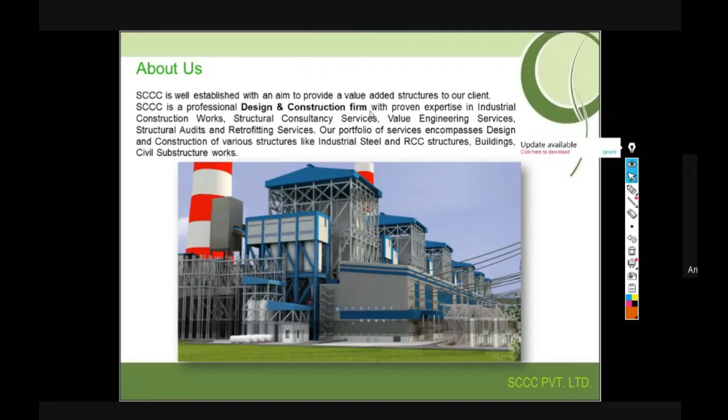What else? Sir, in the water and wastewater sector, we have different structures like water treatment plants and wastewater treatment plants, overhead tanks, groundwater reservoirs and pump houses. Correct. And in the irrigation sector, we have structures like river training works. Yes, in the dams we can say. What else?

In infrastructure, sir, high-rise buildings, residential, maybe commercial. Yes. For offices we want commercial buildings. For residential purposes there are high-rise buildings, mid-rise buildings, or bungalows. So building is one of the big sectors, with different building projects. Then there may be retaining walls. So one is related with the building sector, one with the water sector, one with the transportation sector. What else?

One of the important sectors is the industrial sector. What kind of projects or what kind of structures are there in the industrial sector? Chimney, sir. Yes, chimney. Conveyor works, maybe it is a part of mechanical engineering. Yes, conveyors or bridges, pipe bridges, pipe supporting bridges. Yes, conveyor.

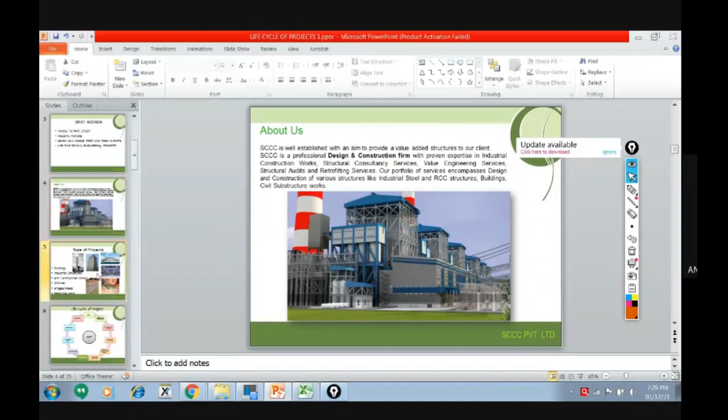So a lot of structures are there in civil engineering, and as civil engineers we should be happy that we have a lot of opportunities in civil engineering. These are few; there are many more. We discussed buildings, industrial sheds, water treatment plants and water tanks, chimneys, bridges, retaining walls, and so on. There are a lot of structures.

Now, if you look at the structural part, our aim in the training program: civil engineering is a very big and vast field. We are here to develop our thought process such that wherever we go, whatever career we choose, we should fit in that career. Whatever industry we are working in, we should be in a position to pick up and make use of all this knowledge, so that you are confident you can absorb in any industry comfortably, because your thought process is already developed.

Your confidence is already developed by learning this. Okay, so this is our aim. Thought process is a holistic word, and you'll come to know gradually, because it's long-term; it is not something you can develop within 1 day, 1 month, or 1 year. It takes a lot of years. But the right thought process we are trying to develop within this training program. What is right is a very subjective matter.

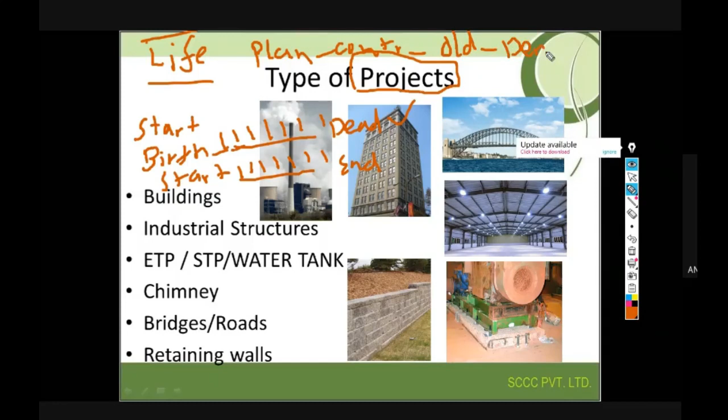As it is applicable to the person, it is also applicable to the projects. So there is a life cycle. We construct a building, so we do the planning, we do the construction, and after the construction, we are supposed to do the maintenance, and the structure becomes so old that we need to demolish. Once it gets demolished, there is again a plain land, and we again reconstruct the new building, and again it starts with the plan. So this is life cycle, and for any project there is a life cycle.

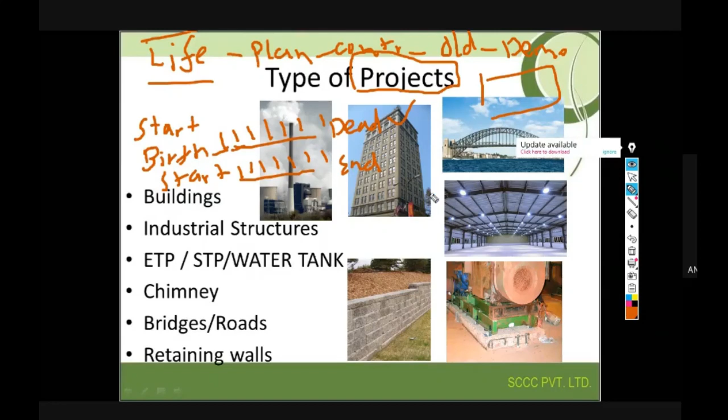We'll understand this concept of life cycle through one sample project of a building, so that it will be clear. For construction of a building, what do you require? Land. Yeah, so we require a land. Material. Yes, we require land, we require material, right? Construction labor. Sir, 3M: manpower, money, and material. Yes, so there are three: material, money and manpower. Then what do we require?

After searching for land, first of all, you do GTI, sir, for soil testing. Yes, bearing capacity of soil. Then you need planning, an architectural plan. Yes. So we require a land. Definitely there is a client who wants to build a project. Let's say we'll take an example of a builder or developer who wants to construct a high-rise building.

For construction of a high-rise building, we require a land. Generally, the client has the land with him. He has money with him. Without money, nothing is possible. So money is required, land is required. Now, on the land, we want to construct a high-rise building, HRB. So this is not enough. The client is not competent to do this construction. He only has money and land.

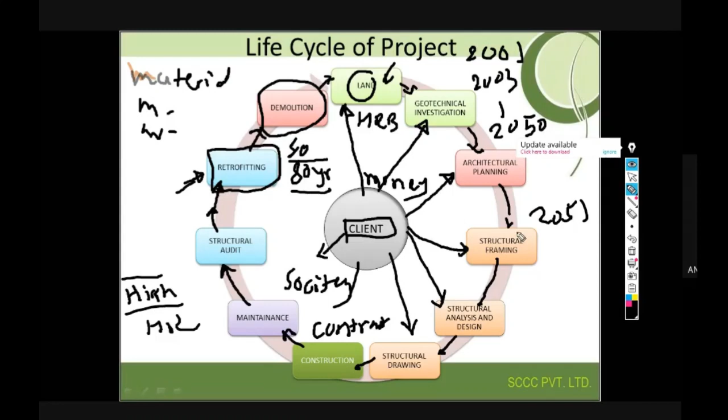So if I ask you, many people know ETABS software, okay. But if I ask you actually where it is used, and what is your role, where you are working, can anybody tell me where the ETABS software will be used in this life cycle? And who will use it, in which company it is used? What is your role or job profile? Where will ETABS software be used?

Structural analysis and designing, sir. Yes. So in this zone, we are using that software, right?

If I ask you where the sanctioning of the drawings are done, let's say in the corporation, sanctioning is done of the drawings - where it is done, and who is doing the sanctioning of the drawings, or who is submitting the drawings to the corporations or town planning authorities?

Sir, a structural designer generally submits the drawing. Yeah, structural drawings are submitted and architectural drawings are also submitted. So these are the two things which are submitted in the corporation.

Who is doing the structural audit? A structural engineer, sir. Structural engineer, definitely. Now, these are the things. Actually, I'm asking random questions just to relate the life cycle and relate whatever we are trying to learn.

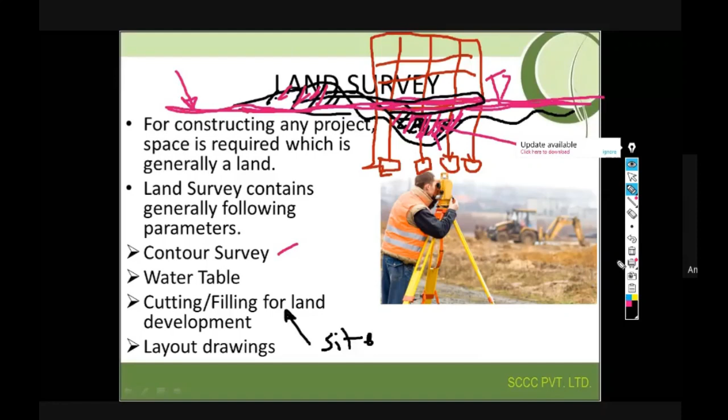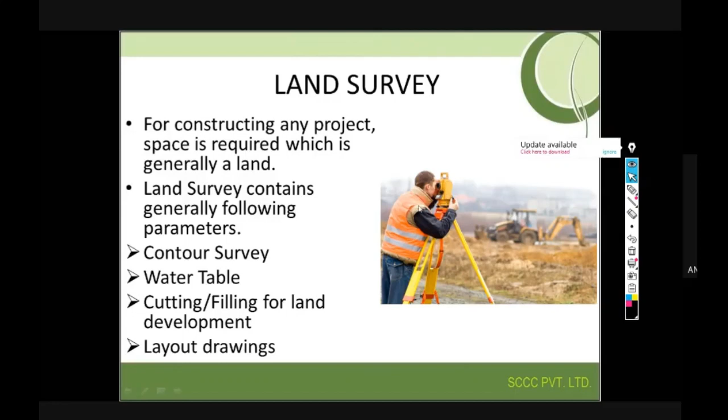So this is something related with the land survey. Once we get the plain land from the client, we are doing the land survey - we means surveyors. What comes after land survey? Geotechnical investigation and architectural planning. Geotechnical investigation is generally done before the planning, or the architectural planning and geotechnical investigation are done in parallel, because the architect is a different agency and the geotechnical consultant is a different agency.

So what is the geotechnical investigation? What do we do and what is the use of it? Standard penetration test to find out the bearing capacity, the different strata, or the property of the soil - to find out the property of soil by using boring, collecting samples after 1 meter intervals, taking them into the lab and submitting a report of load bearing capacity of soil. So one of the important things is load bearing capacity, and water table also we need. Yes, water table - these are very key, important points.

So who is using this data - whatever water table or soil bearing capacity - and why is it used? The designer, sir, for structural design of foundations. Soil bearing capacity is nothing but the capacity of soil to take the load, and the load is coming through the foundations, RCC foundations. So to design the foundation, RCC foundation, we require SBC - foundation design of any structure, it may be a building or any other structure. So this data is required for design of foundation.

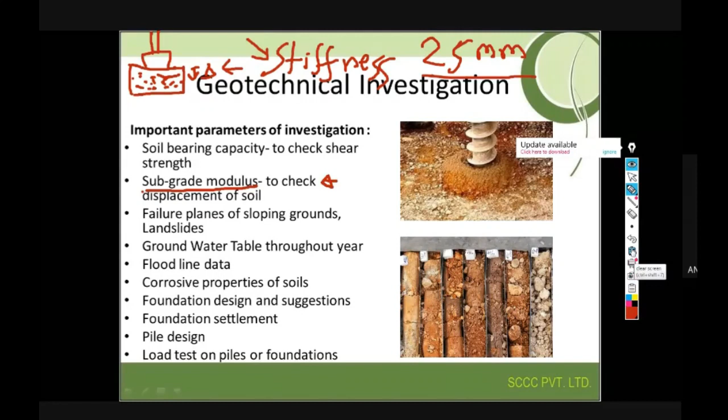We are going to learn that in the foundation part of our training program, somewhere in between. So there we'll learn what this is. There are a lot of things we are going to learn in our training program. Try to understand in general and bulleted points only, because in detail we are going to learn a lot of things. Now, what is meant by flood line data?

Do you know flood line? Yes, sir. When we go for the design of any bridge, we need to have the data of the flood level, maximum flood level, and other hydrological data.

For example, if I want to construct a bridge, let's say I'm constructing a bridge like this on the river. This is my river, this is my water. Generally in summer and rain, this is my water level, which doesn't go much high, and this is my bridge. But during, say, a 50 year lifespan, there is a possibility that my water will go till this level.

So let's say sometimes in 50 years, this happens, and this bridge will be of no use in that case. There is a problem to the traffic. So let's say 50 years back, there was a flood line level over here. So will you really construct this bridge at this level, whatever I've shown?

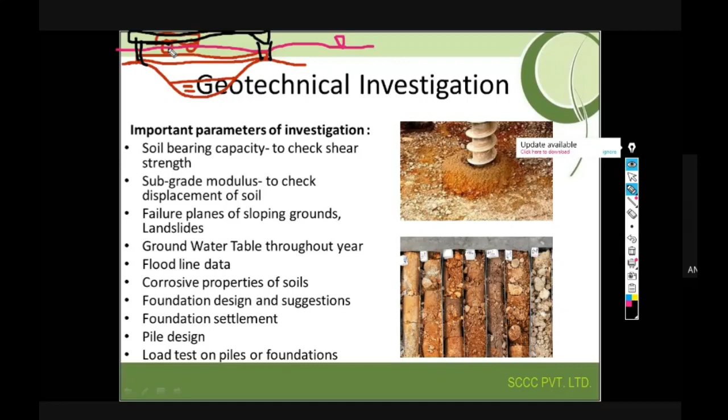Definitely, I should go above that. So I will definitely construct a bridge like this, so that at any time in the lifespan, there is no possibility of the water going till the top of the bridge, right? So this is required for this, even for the buildings also.

See, generally there is a river. Let's say this is a river. So the buildings are constructed near the river, but such that they are not in the river. Let's say this is my flood line. So we are not allowed to construct this building actually because it is going into the flood line.

So the water will go into this building during the flood. So generally, till this line, construction of the building is not allowed. In general, the town planning authority and department have these drawings, flood lines and everything. So all architects plan the buildings beyond the flood line.

This is, let's say, my flood line. Actually, I'm showing it in section. If you see the river, this is my river, let's say flowing like this, and this is my flood line. I can construct the building beyond the flood line.

Let's say this is my building plan. I cannot construct the building within the flood line. So this is my river edge, and this is the zone within the flood line. I cannot construct in this part, I can construct in this other part.

So to understand this, we need the flood line also. Do you know the Tata Motors plant? Any idea about the news regarding the Tata Motors Nano plant? It was shut down. Where is it now, the Nano car plant? Gujarat, sir. Yes, now it is in Gujarat, Sanand.

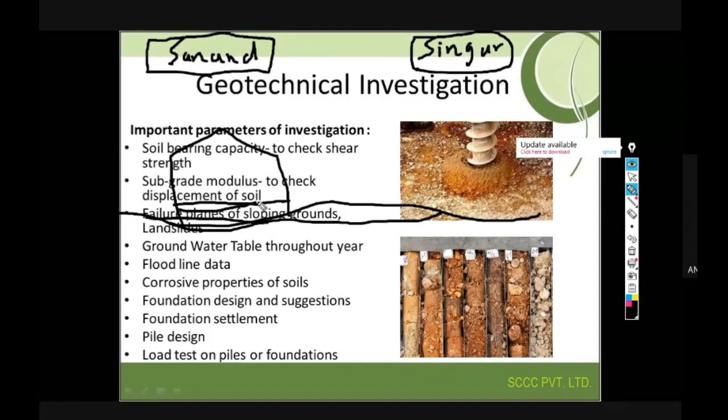There were warehouses, they started the columns actually first. And this was the plinth level where the manufacturing was supposed to be done. And actually, so, just a moment.

The columns were casted, foundation was done, piling was there actually due to the marshy land and weak soil. So there was a piling, and these columns were coming, and after that we are supposed to do the structural sheds like these pre-engineered buildings and trusses and so on. And this was the plinth level.

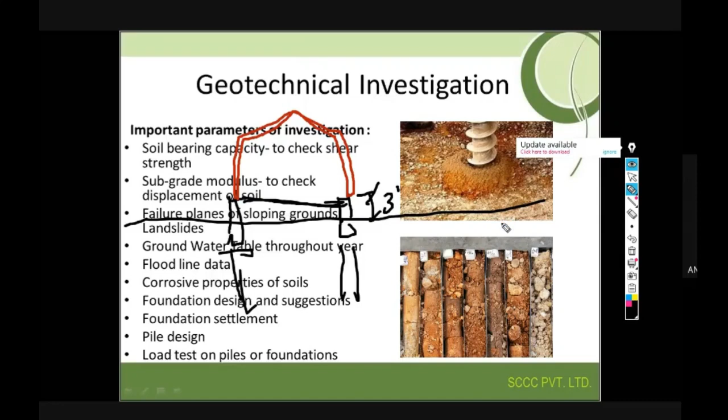Okay, plinth level was around say 2-3 feet above, so it was quite above, and this was the natural finished ground level. During that, I don't remember that time, there was a huge flood, and during that flood, the water was till this level. In that flood, in that rain, this was the level. It was around 1 meter. 1 meter, sir, quite big, 3 feet around.

When there was a flood and all water, all plinth work was completed. This fabrication was supposed to be done, but this was going above the plinth by 1 meter. At that point, due to not understanding the flood levels through the town planning authorities and so on, Tata Motors was in big trouble during the construction phase.

Then after that, the structural department extended this structure. They redesigned the structure and they extended this like this. So this part was redesigned and strengthened during the construction phase only. And they again changed this and they shifted these heights and so on. Only due to the lack of understanding the flood line, flood level, we can say.

So this is such an important point, even though we generally ignore it. Even experienced people can ignore this. This happened. I'm not blaming anybody because it is not about blame. Some of them missed it because many times we start the construction. Yes, there is a plain land, start excavation, do this, that.

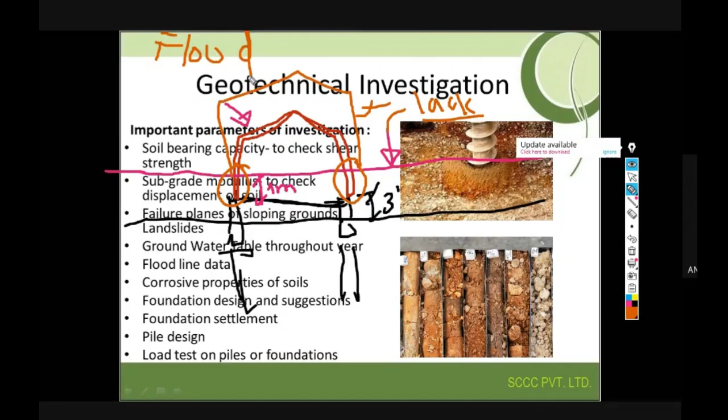Because see, flood is something which comes very rarely. Flood is a very rare case. But from the previous experiences, at least we should understand that. Okay, so this is a very important part, flood line. Corrosive property is something related with the foundation because concrete will deteriorate if there are corrosive properties in the soil. Foundation design and suggestions are also given by the geotechnical people.

Foundation settlement, I discussed subgrade modulus, because permissible settlement we should make sure of in the foundation design. Pile design is also generally recommended by the geotechnical consultants. They also do the testing of the piles if there is weak soil. So do you know how the geotechnical investigation is done?

Let's say I am having this natural ground level. So they do the core logs. Core logs are there at different intervals. They drill in the soil till the rock, maybe 10 meters, 15 meters, 20 meters, at certain intervals. And these are the core logs, we can say. Can you see this? So this kind of drilling is done, and then we check samples at each level.

So there may be some soft soil, then maybe some murum till this level. There may be some weathered rock, then there may be compact basalt or different proper soil and rock within that depth. And the geotechnical people study these samples, and then they come out with the SBCs, they come out with the properties of this soil and so on.

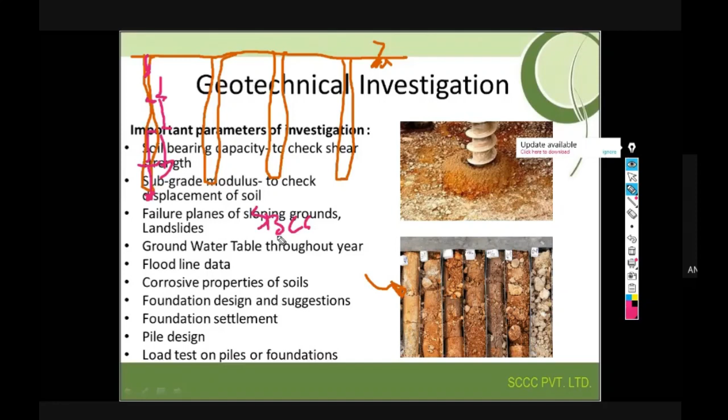We will have a detailed session in between on the geotechnical investigation, where you'll understand how the geotechnical report is to be studied and what data we take as a structural engineer in the design. Okay. The next part is architectural planning. So what is the architect doing? Planning, building plans.

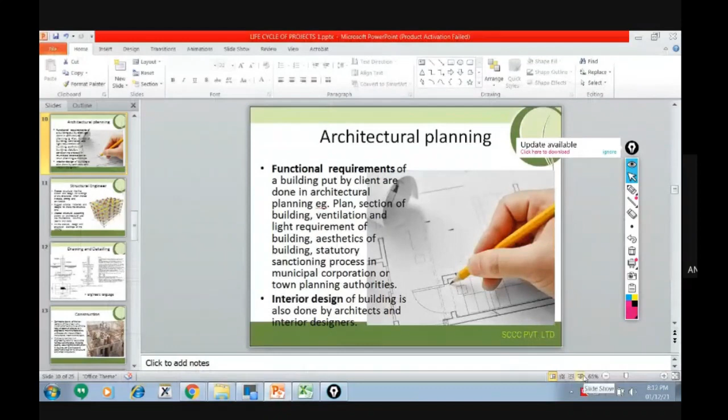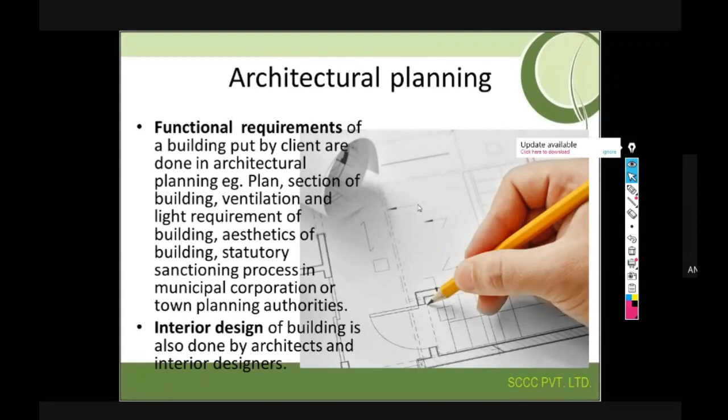Yes. So in a nutshell, the structural engineer is responsible for the safety of the project, safety of the building. So whatever concrete, steel, or members he is putting to support the civil elements or materials, walls, slabs, or whatever, he's making sure that it will be safe and stable. So he's creating stable structures, strong structures, and serviceable structures.

Can anybody tell me what is meant by stability? These three S are important, and these three S together are nothing but the safety of the structure. Can anybody tell me what is meant by stability of the structure? Sir, stability means balancing the reactions due to earthquake, dead load, live load. It may be lateral reactions due to earthquake forces, or vertical reactions coming onto the structure due to dead load, live load, or wind. So whatever system we develop for those reactions, that is stability.

Yes. So, maintaining equilibrium equations, equilibrium in Fx, Fy, and moments. Yeah, good. But stability is making sure that the structure will not collapse. I will just give a small example. Let's say there is one frame like this, and all joints are pin joints. If I put a load like this, all are hinge joints, what will happen to this structure?

So strength means something related with the materials. Capacity of the material can be said as strength. Material capacity. See, I'm using very small common sense words. I'm really not interested in going into too many technical terms for these sessions, because as a common person, we are trying to understand this holistic picture. And then we will go into the engineering aspects, then mathematical aspects, and so on. Strength is something related with the material capacity.

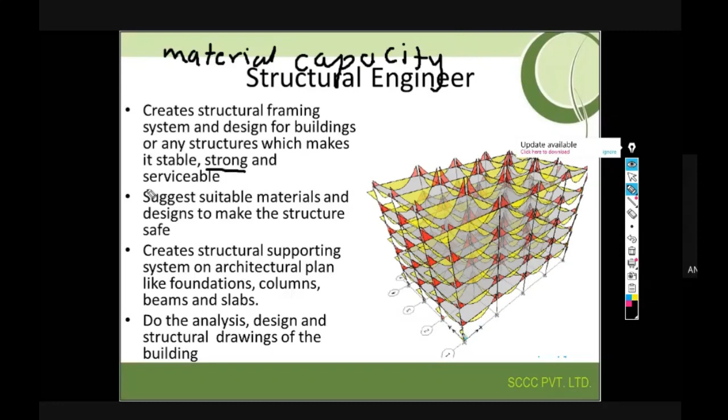What is serviceability? What purpose, sir, for which that structure will be designed? So there should be no deflection or crack during the time when the building is in use for the intended purpose. Yes. So serviceability is something to control the deflections.

Hello? Yes. Hello. Hello. Yes. Sir, hello.

The cracks and the deflection should be within the permissible limit as per the IS code. Yes. So many times, if you are staying in a bedroom, and the bedroom beam is having a bigger span. Let's say this is a bedroom beam, this is your bedroom, and your beam gets deflected like this. Will you really be happy to stay in this room? This is a deflection of the beam.

Let's say I'm a structural engineer consultant and I'm making sure that it is structurally stable, it will not collapse. I'm guaranteeing you that whatever beam steel, concrete and everything I'm putting is strong enough and satisfying the codal requirements. But it is deflecting like this. Will you still like to stay in this room? No, sir. Because it is giving you a scary feeling, because you may feel that it may fail. You will definitely not like to stay in this kind of room.

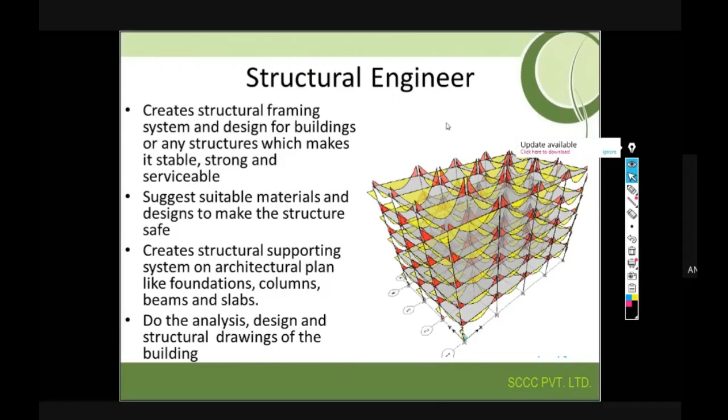Then let's see the kinds of structural drawings. Try to understand, drawings are the engineer's language. Drawings are the engineer's language.

So we have covered the AutoCAD software because this is a very important part in any engineering. Structural is also one of it. So basics of drawings and basics of AutoCAD software are very important in our training, and you should know that. There are many other structural drawing aspects we are going to learn in future sessions.

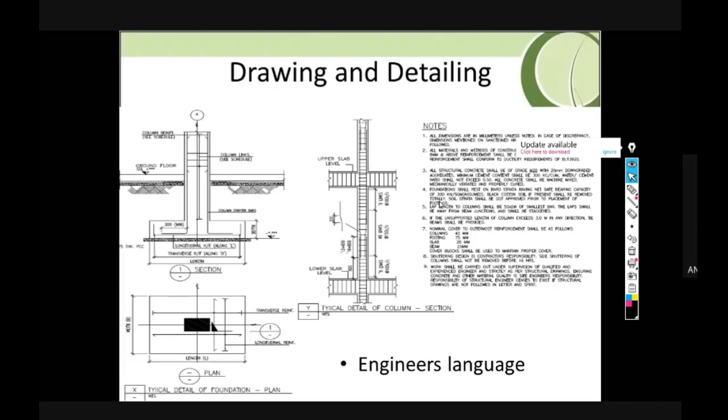Then comes construction. This is a very important part. What are the key activities in construction, and who is involved in construction? Sir, the client. Contractor. Yes, contractor. Contractor is one of the important stakeholders in the construction process. He has a team of laborers, unskilled laborers, fitters, carpenters. Then there are many people actually, electricians, plumbers, so a team of laborers we can say, skilled and unskilled.

There are civil engineers involved, site engineers who look after the supervision work and quality work. There are machineries like poclain, compactors, plate compactors, cranes for lifting heavy objects. So there is a team of people working on the basis of drawings prepared by architects, structural engineers, and other consultants.

So using the machineries and the team of laborers, the contractor makes sure that the construction of the building is done as per the drawings, as per the quality, and within the timeline given by the client. So this is construction. You know this many times. So the contractor and civil engineering team are responsible for the workmanship, material quality, and the specification. It should be done as per the specification given in the drawing.

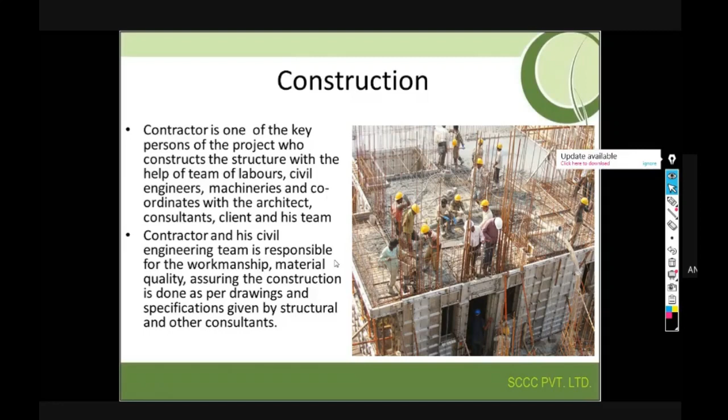Sir, paint work. Yes, painting. Crack filling, yes. Lift maintenance, then crack filling. Leakage, waterproofing, electrical. Yes. So generally that is the general maintenance when the building is new, and after the building becomes old, we have to do the structural audit.

So what do we do in the structural audit? Why is it done? To ensure whether the structure has adequate strength or not. So what is the current strength? NDT. Yeah, current strength means what is the current concrete strength, what is the current state of health. And there is a possibility, see, many times people do overloading.

Let's say there is a bedroom designed for 2 kilonewton per square meter live load. Now that person is using the bedroom for heavy storage, let's say 5 kilonewton per square meter. That means it is overloading, because it was designed for 2, not 5. So in the audit process we should understand whether there is any overloading in any room. Then deviation of use. Overloading is also part of deviation.

There are many times people enclose the balconies. That means my beam was designed for the railing load, and people have created a wall on that railing. So the beam is not designed for that wall load. So deviation is there. People use partition walls on the slabs in the rooms.

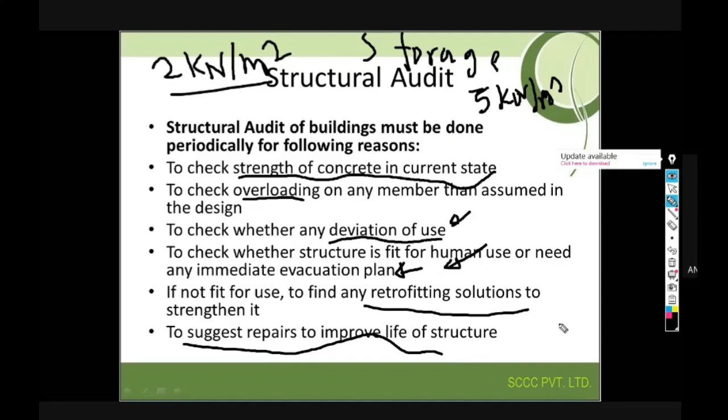So we should tell them that the building is not fit, and please do the evacuation of the building. So that is also used. And many times we can suggest retrofitting solutions to that building to make it strong, and even suggest repair methods to increase the life of the structures. So many times we can say, please do this repair work so that life will be increased.

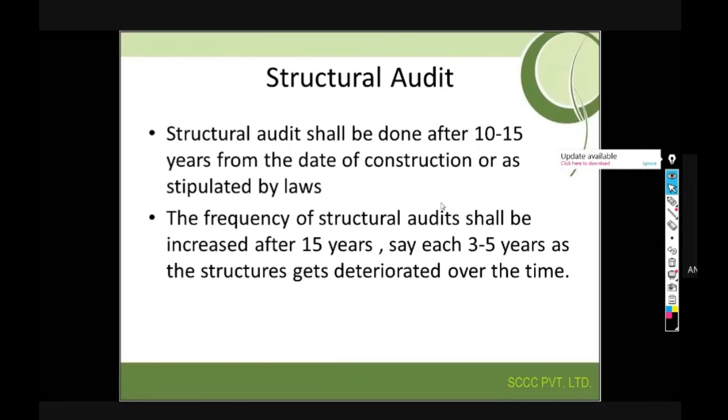So what are the steps in structural audits? Physical verification is there, visual inspection is there. Yes, so visual inspection like checking the cracks, leakages, rusting of steel, overloading, and so many things. There are a lot of things in visual inspection. NDT, rebound hammer for checking the indirect compressive strength, ultrasonic pulse velocity test, UPV.

Core test, we can extract the core from the building and check it in the lab to actually check the concrete strength. Then there are many tests like chloride and sulfate attack and so many tests. These are general tests I'm talking about. Definitely we are going to cover this in our training program in the structural audit part.

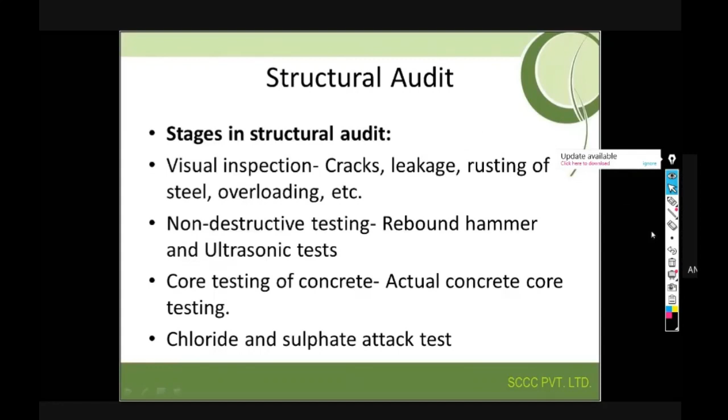Sir, what is rebound hammer? Rebound hammer, I'll show you. This is a rebound hammer. So we can press this rebound hammer on concrete, let's say a column or beam or slab. And there is a number coming on this gauge, this instrument. This number is related with the surface strength of the concrete.

And there are IS codes which give the guidelines to relate this rebound number, RH number, with respect to the concrete strength FCK. There is an equation given in the IS code, and by that we can understand the surface compressive strength of the concrete. So this is the rebound hammer instrument, okay.

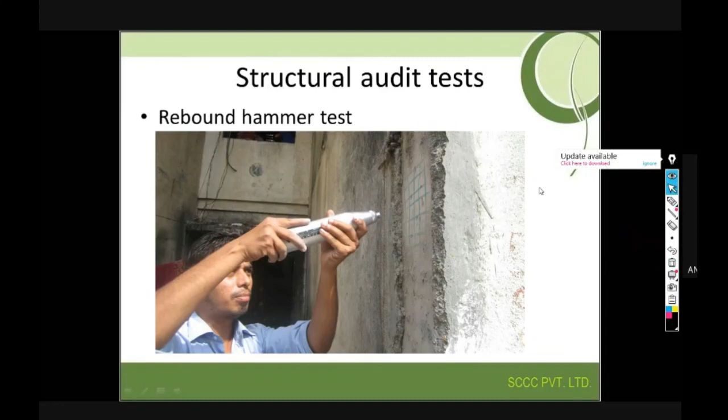Then there is ultrasonic pulse velocity. We are going to learn this in structural audit, but let's say this is a column, and there are two. So this is a line, and this is an instrument, my ultrasonic velocity instrument. So the waves are passed through the concrete like this.

Let's say this is my column. So these waves are passed, and depending on the velocity of these waves, we can understand how the concrete is inside it. So the quality of concrete can be checked with this UPV test. Okay. Yes. Anybody want to say anything?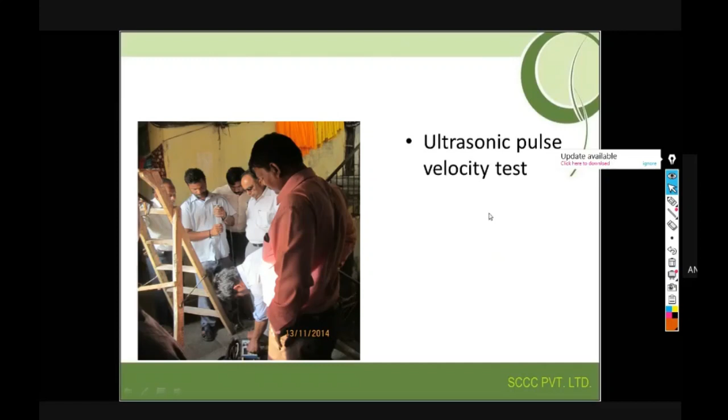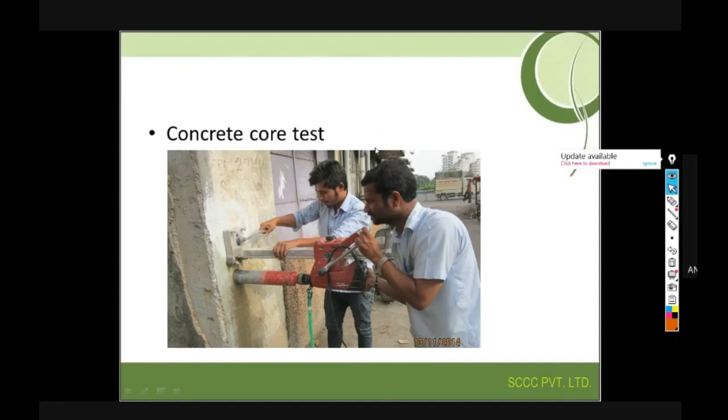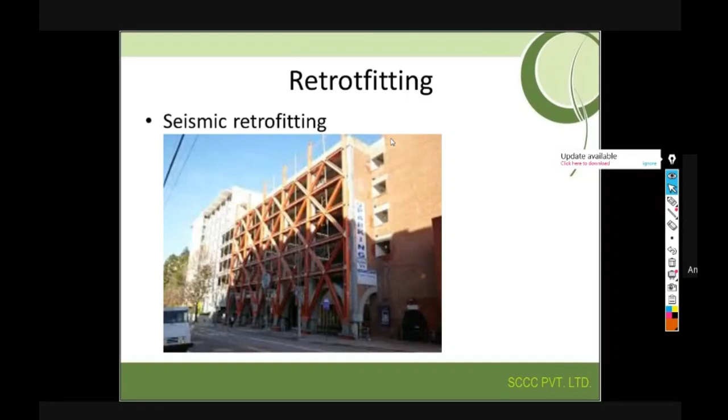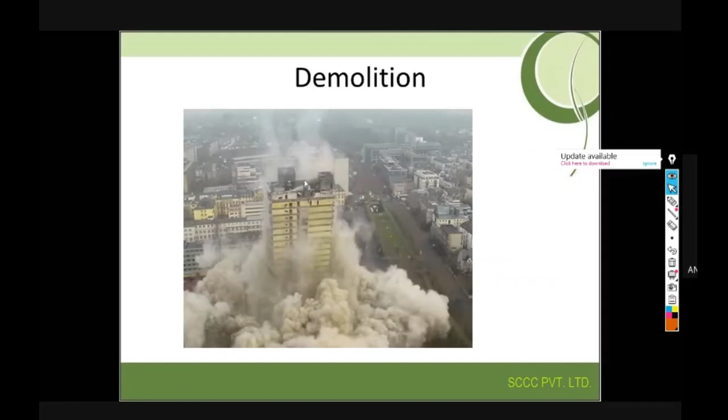Then retrofitting, there are different retrofitting methods, strengthening methods of columns, beams, buildings, and so on. We will learn that in detail in the audit part, how we do it for a practical project. And then finally, if the building becomes very old, we need to demolish. That is the finishing of the project. So this is related with our life cycle.

So responsibility matrix, let's understand who is responsible at every stage. Okay.

Just a moment, I'll just mute the disturbances there. Okay.

Now in responsibility, land is owned by the client, so the client is responsible related with the land. Geotechnical investigation is done by the geotechnical engineers, who are basically civil engineers. Architectural planning is done by the architects.

Generally, this is a profession by architects, but even civil engineers can also do some architectural planning. So there are some projects which civil engineers also can do the planning.

Structural framing like column positions and beams is done by the structural engineer, who is basically a civil engineer. Structural analysis, design, and drawing are prepared by structural engineers, who by qualification are civil engineers.

Construction is done by the team of contractors, laborers, and site engineers. I'm just trying to give you who is responsible at every stage. Maintenance is generally done by the client or societies. Structural audit and structural retrofitting is done by structural engineers. Demolition is generally done by special agencies. So this is the responsibility matrix with respect to the life cycle of the project.

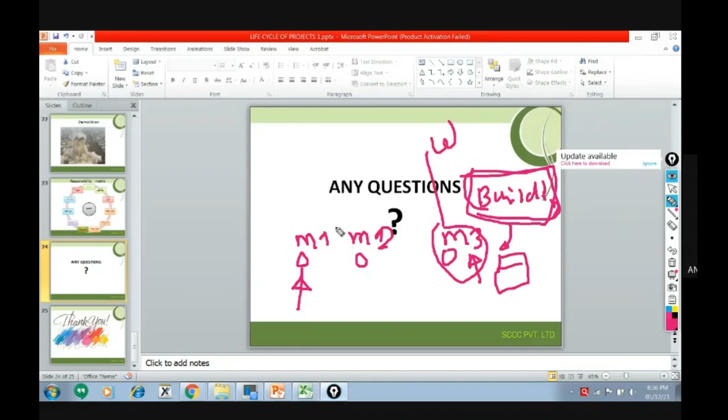Actually, this M1 thought process is not very useful. You should become a holistic person. Holistic thought process is very much important in our life, I would say, not just in projects and civil engineering, but everywhere. So this is my final conclusion regarding this session. Please, if you have any questions, please ask.

Yes sir, one question is there regarding the plinth level. In case we are designing a residential building which has porch columns on the edge line, meaning the eccentric footing is there, in case we are raising the plinth, meaning increasing the height of the floor level by 3 feet or 5 feet above the natural ground level.

So, sir, in that case, if we are providing the plinth beam below the floor finish level, so the column which is on the edge, the porch column, when we tie the plinth beam, the rest of the beams can be tied, and the level of that beam will be below that level.